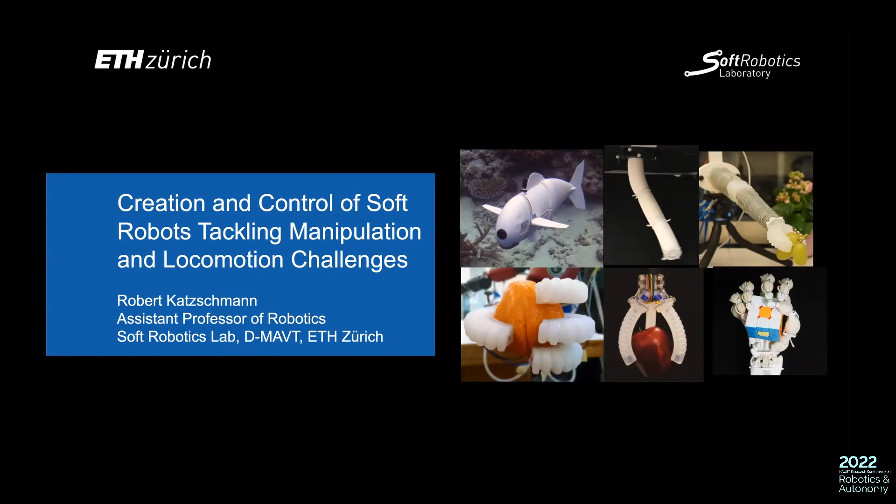So just a brief background to give you an understanding of how did I come to this point. Well, I previously was a systems engineer at Auris Health, and there I first got introduced into how to do medical systems, primarily surgery robots. And so it got me an exposure to the idea of taking devices that could be used as endoscopes or other sort of devices that can go into anatomical lumens. And from that point, I moved to do a PhD at MIT, and there my focus was on soft robots.

I then worked at Amazon Robotics as an applied scientist. And while I was at Amazon, I was focused on manipulation. And then I focused at a startup as a CTO to do food robot manipulation. So this is my background. But let's go into the motivation of my research.

So for my work, I've primarily been inspired by nature, as many have been, but what inspires me particularly is the continuous deformation that is used in the survival of creatures. So here you see a fish that's swimming against the stream. It's very capable of going against the stream. There's one caveat: the fish is dead, it's not alive. And so you see how this fish is swimming up the stream against the flow, but it's actually not doing that willingly because it was killed just before this video.

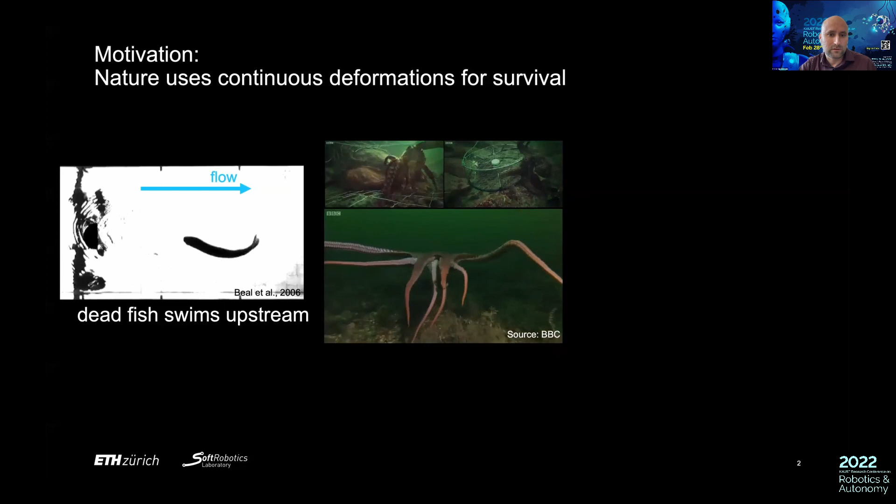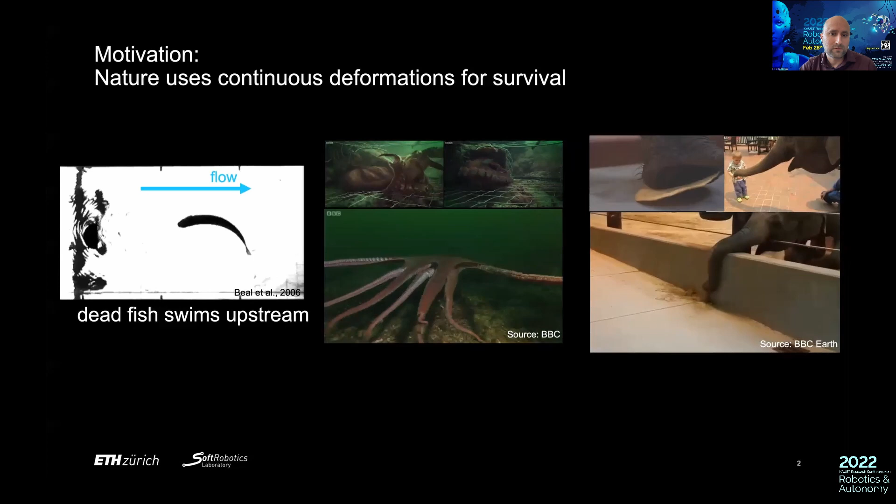And similarly, you can look at creatures such as an octopus, or you can look at elephants, and they also use continuous deformations of their tentacles or of their trunks, respectively. And they use that to basically manipulate the world and go around and feel out the world. So the octopus is using its tentacles to capture its prey, and the elephant is using it to conform to the environment and find food.

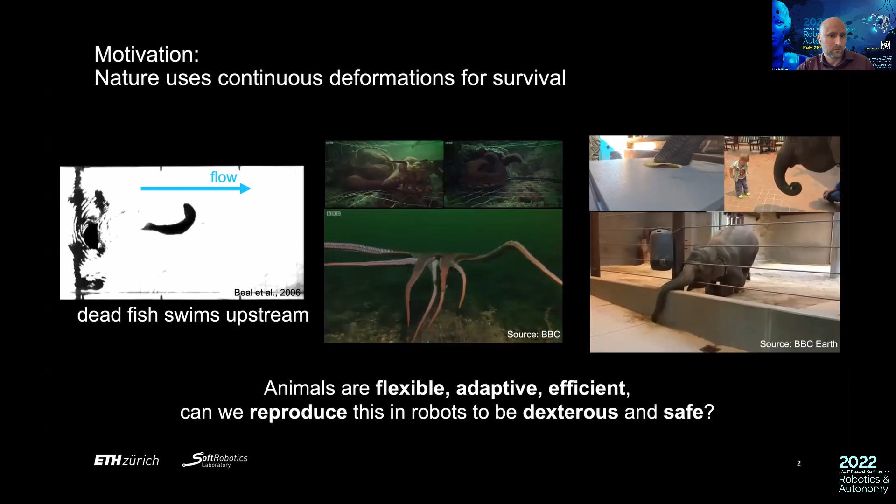So you see, animals are quite flexible. They are very adaptive to the environment, and particularly these creatures with these muscular hydrostats, they're quite adaptive, and they're also very efficient. They don't use the same amount of energy as we use with our robots these days. So how can we reproduce such built-in intelligence while being dexterous and safe with our robots?

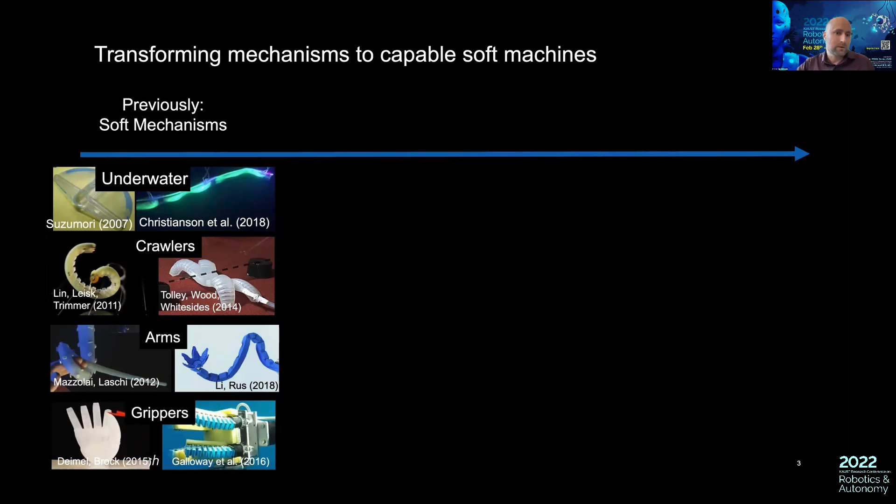So a lot of research in the field of soft robotics has been focused on mechanisms that can work underwater, or they can be crawlers, they can be arms, or grippers. And so the next generation of these robots is to take them to another level, to say, can we build systems that are fully integrated using these actuation mechanisms, apply controls to them to really move them in the way that we want them to behave and move around, and then apply learning algorithms on top of this to actually give us eventual goals.

So eventually our goal should be, at least in the short term, to build more biomimetic locomotion systems, flexible manipulation systems, but also to recreate intelligent behaviors, such as you see, for example, with an octopus. You can take a young octopus and trap it for its very first time into a container. Like here, you see this glass container with red lids, and then the octopus is capable of escaping by just figuring out that it needs to be lifting that lid. So that is quite a unique behavior that they can learn by themselves.

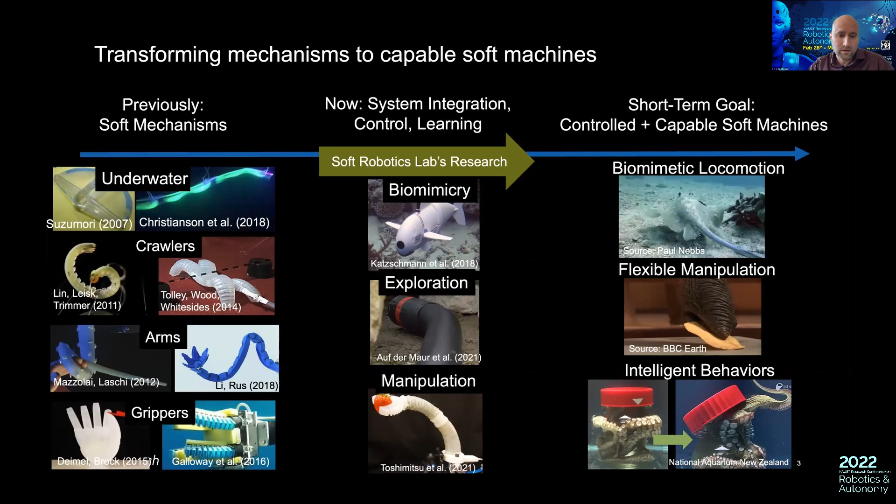So how do you reproduce this? These are really the questions that I'm interested in to achieve locomotion, manipulation, and these behaviors. So in this talk today, I will be telling you very briefly a bit about how we are making single soft actuators, and then how we use them for integrated systems, and then I will be speaking about modeling and control.

So to get started, how do you create a soft robot? You start off with a design for these soft actuators, and I won't get into much detail of how you make them. You can look up by now many different papers in the field that describe the different designs of soft actuated robots. But here's an example. This is a fishtail that has two chambers that can be pressurized. You pressurize it with liquid, and that causes the structure to deform.

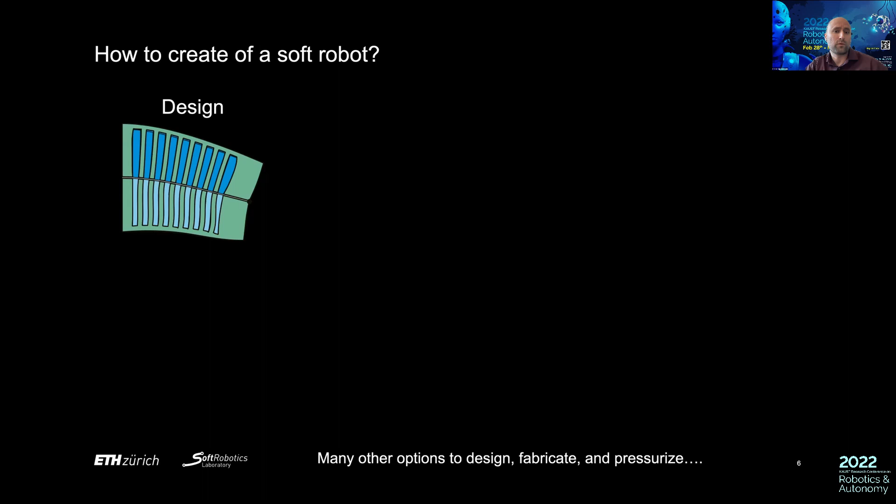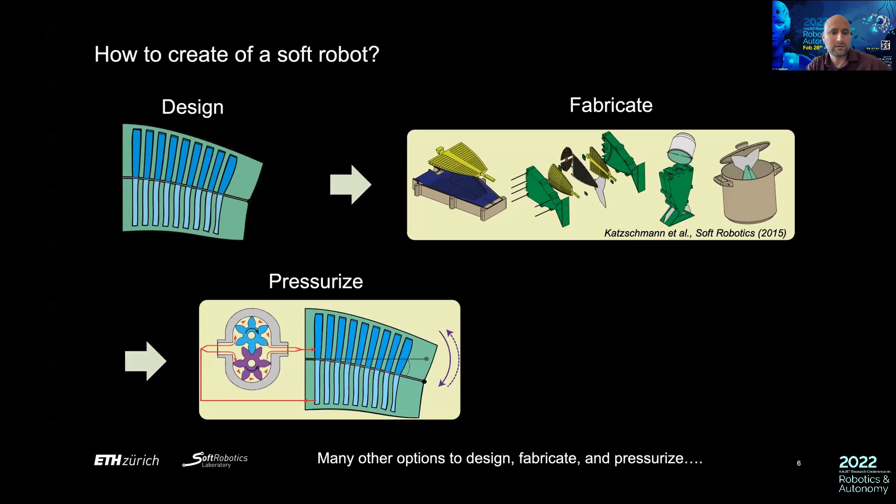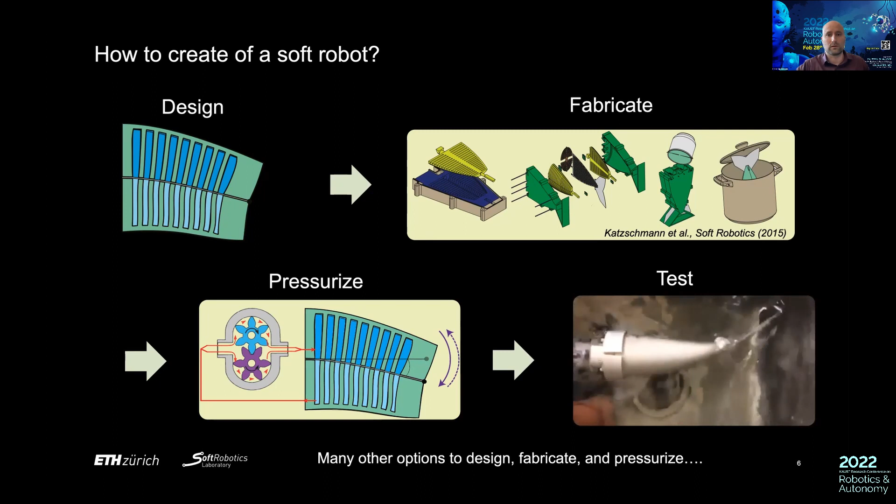And then you need to decide what fabrication approach you're going to be using. Are you going to be casting, 3D printing, or using another method for making these robots? And then in the end, you need to choose a source of pressurization, like a power source that provides the forcing to the structure. And so from this, you then have to go testing, and then you repeat this cycle over and over until you actually have a functional soft robot that can actually do what you want it to do.

So with this being said, let's see what we can make with this. With this approach, we can, for example, build a soft robotic fish. That was one of the things I've done for my PhD, which was this underwater fish robot that's using this tail. And it's a structure that you can then deploy in the ocean to let it swim. And the goal was to build a system that we could use as humans deploying it in the ocean to do biomimetic locomotion, so have something swim like a real fish, and see how we could use this as a spying device that could observe marine life.

So here's SoFi, which is the underwater exploring robotic fish that is capable of swimming in the ocean and can look into its surrounding environment and look at what's going on. And as you see, SoFi is swimming across the waters, and it's just looking at its surrounding species, and it's filming continuously, while there are divers a couple of meters behind sending it communication and telling it what to do.

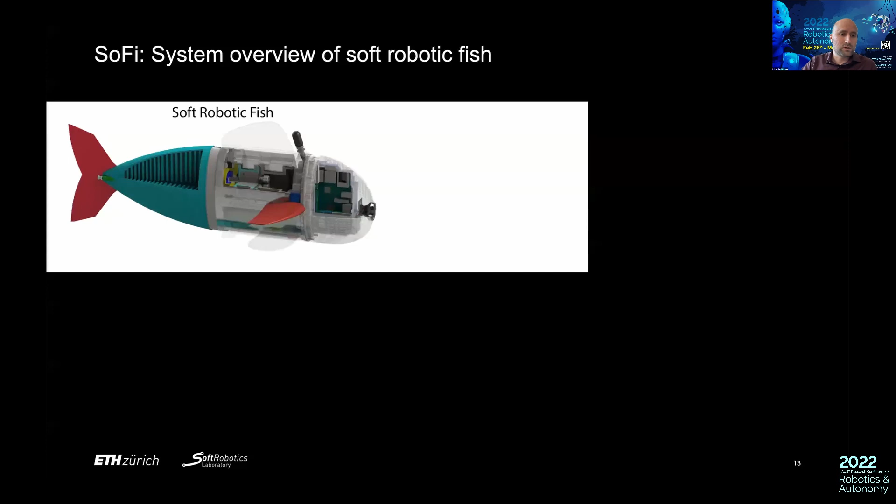So the system is essentially a combination of a soft actuator and a rigid structure. So you're combining both the silicone tail that's shown here in green. The green tail additionally has a built-in fin that goes through this tail. And additionally, on the other side, you have these buoyancy control units, the pump and the dive planes, and also electronics that you need to communicate with it. So there's an acoustic modem on board.

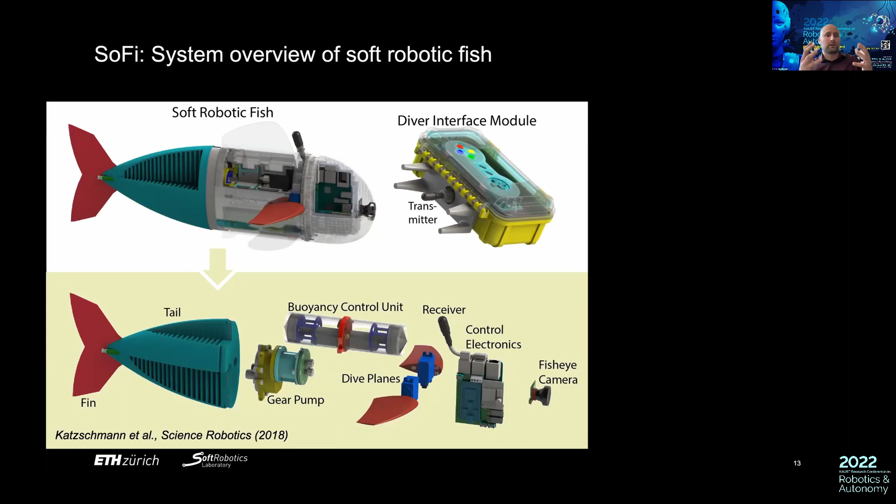And we're using this acoustic modem so that on the other end, the diver is holding a device, which is a diver interface module. And this device can talk to the fish and tell it what's going on. So here you see we have this device broken up that is capable of going underwater. It's filled with oil, so this allows it to be portable and with the diver.

And so we took SoFi into the ocean, and we tried this out in multiple coral reefs, and we tried communicating to it, and that all worked, and we were able to send it commands and to tell it where to go. And then we had it navigate over the various coral reefs. Here's an example of it going over the cabbage patch, which was one of the coral reefs that we were diving at. And in the end, we could use SoFi to basically get close up to other species and film them and observe them and learn from them.

But one thing that was limiting to all of this was that all of this work required manual design to come up with this soft robot, with this creature. And there was only limited autonomy to the system because, I mean, it was able to swim and we were able to tell it commands, but SoFi would not have been able to survive by itself down there in the ocean if there wasn't a diver that every once in a while could help it out.

So that being said, that got us to one of the interesting topics that we are focused on: how do you actually model these robots? Like, you can build them, we can show that they work, but how do you actually deal with these systems if you're having not just one, but multiple of these actuators, and you bring them into series, you bring them together, and then you want to show that you can build something controlled and a learning application.

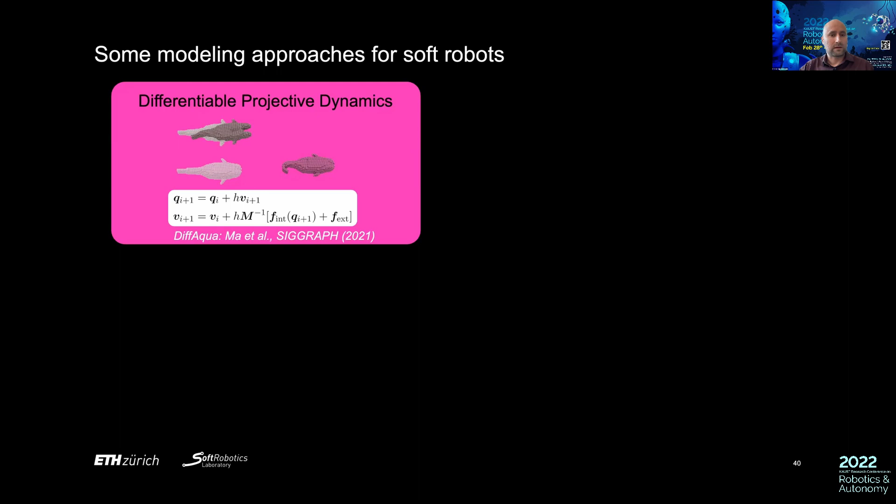The other method we're using is minimal parameter models, where we are just making very strong simplifications about the structure, and then we're using an augmented rigid body model to describe the deformation of these continuously deformable structures. Then we're also looking into reduced order finite element methods, where we are not taking a full finite element method, but we are then reducing its order to still capture the main modes of deformation. I will not be speaking about this today.

And then the 4th method, which I will also be presenting today, is the deep stochastic Koopman operator, which is a method that allows us to learn the dynamics of our system in a way that it's a bit easier to understand what this black box model is learning, and then applying it to control approaches that work on a lifted Koopman space.

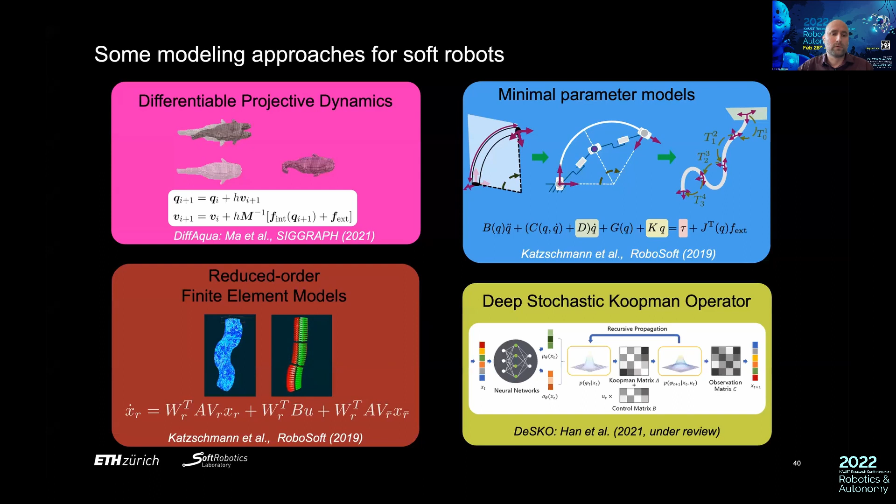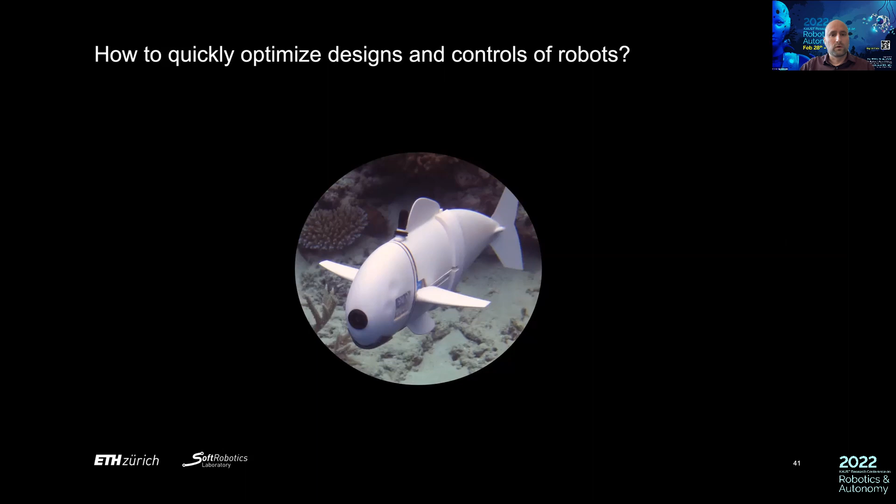So let's start off with this problem of the fish again. So I was saying to you, we were using this manually designed fish robot. And the big challenge with this man-designed fish robot is that, well, we do not quite yet know what shape we should be taking to get better performance and what controls we should be applying to a structure if we have more chambers that we can control individually in the soft actuator. So what we're saying is, well, let's say we have inspiration from nature. We have all these different shapes and designs of fish that we could be taking.

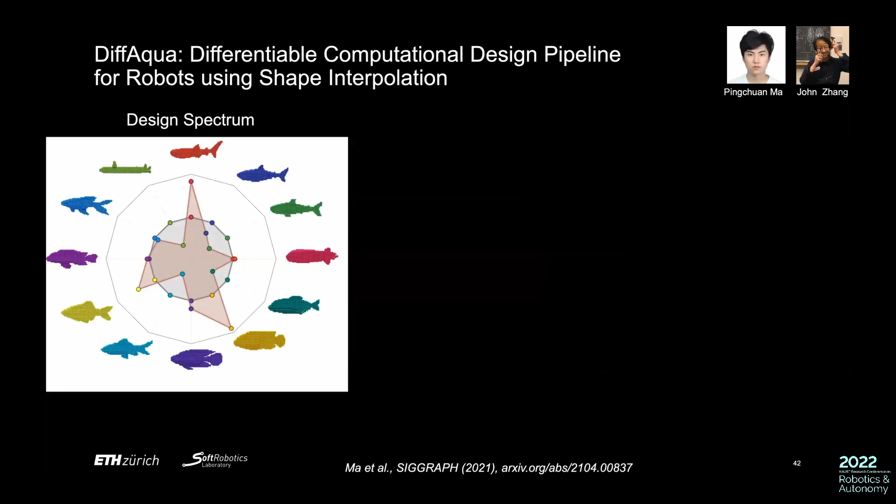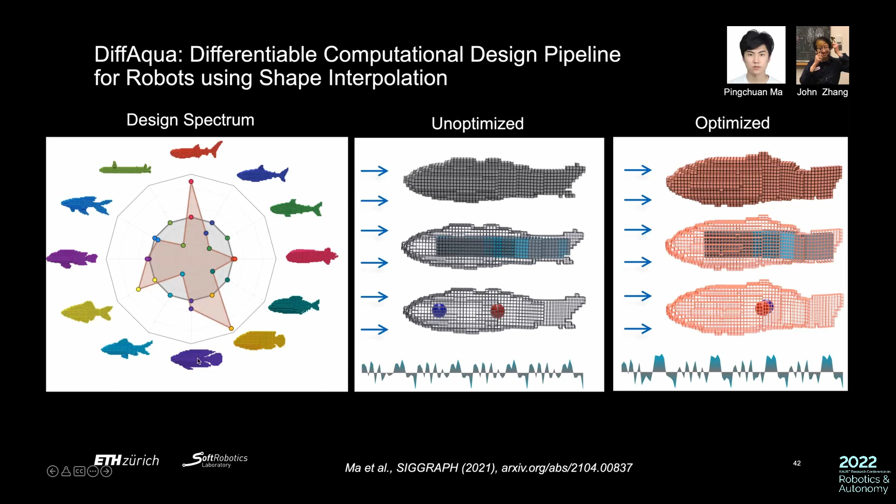And now let's take those designs and let's say we span the whole design spectrum. We start off with an unoptimized design and we end up with an optimized design for a particular task. That's the pipeline that we are basically proposing in our work: this is how you could be starting off with this model and you end up with an optimized model that's somewhere a hybrid in this design space. So let's say you initialize the weights of all of these designs with this level, and after our optimization, you come out with this final, this is a radar chart that you're seeing here, final set of weights of how much each different swimmer is part of the final design.

So here's a visualization of this. So say you have 3 different designs you start off with, and this is how it would look if you were to interpolate between those different designs. So you see I'm going in the interpolation space, I'm changing between 2 different ray type structures to a normal fish, and that's how the muscles are allocated within the structure.

And now we are taking this design, and this is our design space, it's parameterized, and then we are running this into a controller. We have 2 different control approaches: we either run a sinusoidal control approach or a fully connected neural network that allows us to send command signals to the individual muscles. And with this, we can then control the fish and tell it, please go forward, please go left, go right, and do a swimming task that we are defining.

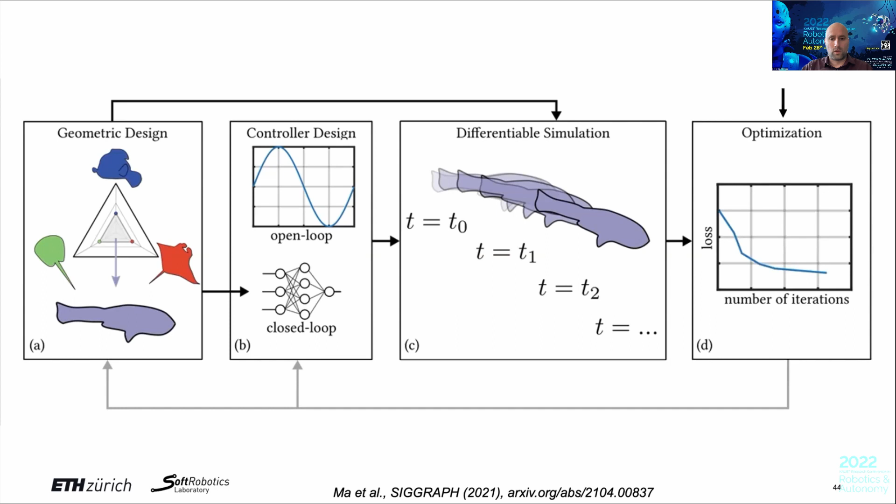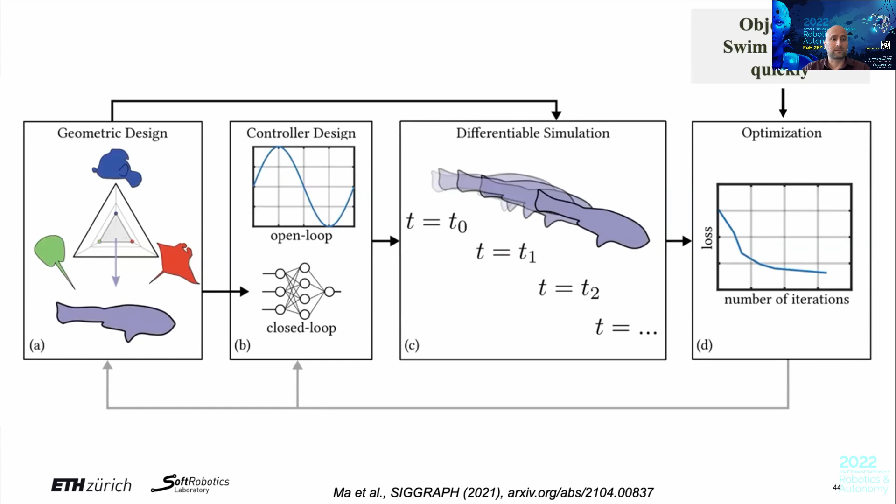And in the end, we come up with a loss. And that loss then says, okay, this is our final loss. This is what we are trying to optimize for, let's say, fast forward swimming, and it's capable of achieving a better forward performance. So let's say you start off with this initial guess up top, and in the end, you come up with this optimized shark design that came out of this interpolated space of designs. Here we haven't optimized for the control, we only optimized for the shape.

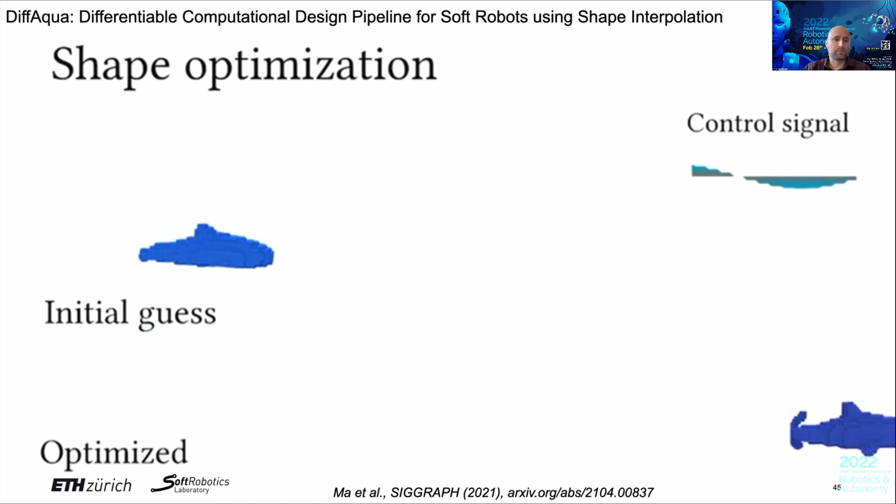But we could also similarly, for example, take the 3 initial shapes, which are the baseline shapes up here in red, green, and blue. And in the end, we come up with this optimized hybrid swimmer design, where we're able to come up with both an optimized design, but also an optimized control policy that's acting on the muscles that we distribute in the structure.

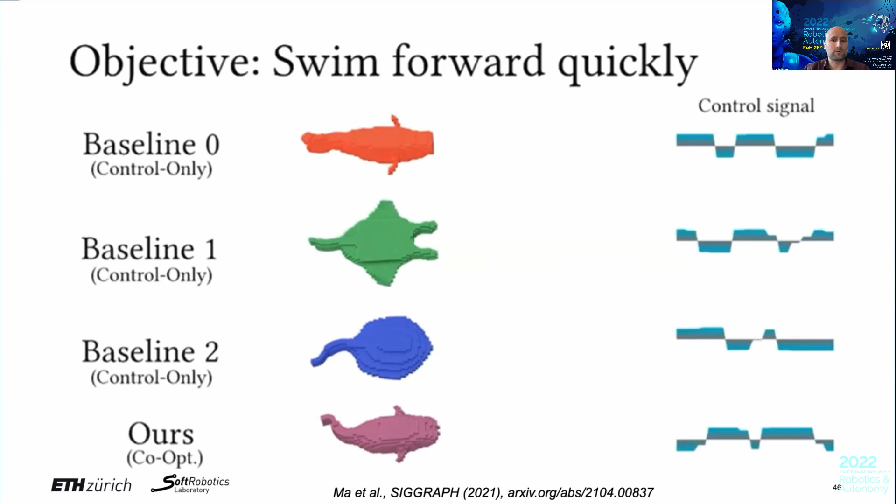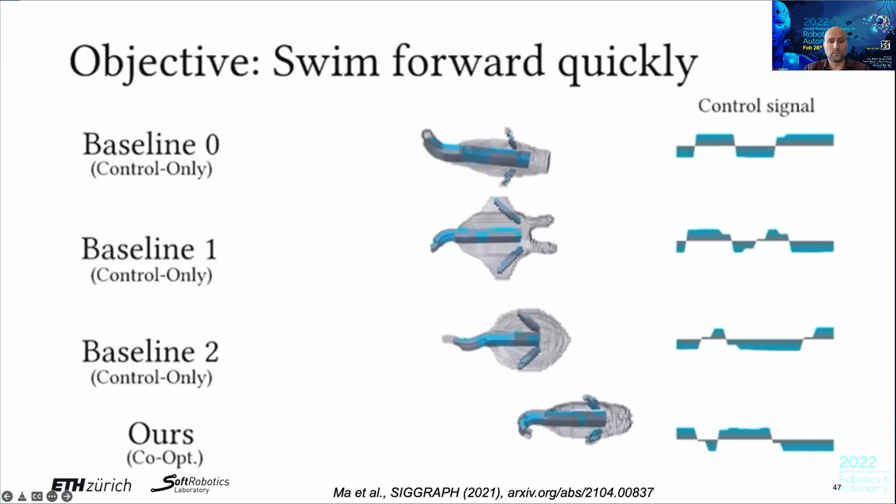So in the next slide, you see how the muscles actually are actuating. You see how there's a traveling wave going through the muscles of the structure, causing the swimmer to get further in the same units of time. So all the 3 top swimmers on the top, they're not as fast as the one on the bottom.

And then when you look at this, we are basically doing a multi-objective optimization here. We are co-optimizing for multiple objectives. We're not just wanting to have a fast swimmer, but we also want to have, for example, better efficiency, meaning less energy usage of these artificial muscles.

So on the top, you see this trade-off space starting off with a high-speed swimmer that is not very efficient. And then you're working your way down to medium speeds, to the medium efficiency, and down to a high efficiency swimmer. And this is basically our Pareto front that we are traveling along. You see it with these white and these colored dots along all of the different designs that we were generating in our approach. And the nice thing about our approach is because it's a fully differentiable pipeline, we can just step with gradient descent through this pipeline and optimize it.

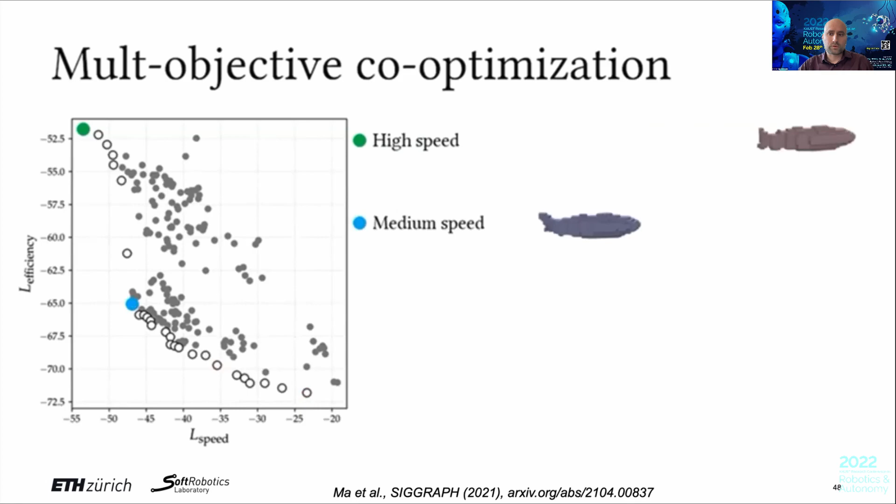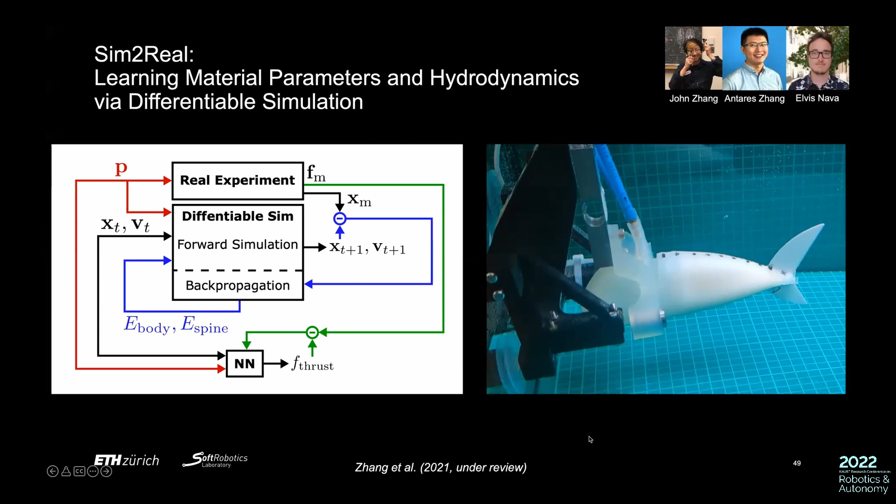So then we tried this out and we actually took this to a real life application. And we said, hey, let's try this out. And we see we can actually also replicate this in an actual fish robot that we're building and trying it out on. Then we combine this with a thrust measurement unit, and we can see how well does this work.

So our simulation then has to also account for the buckling effects of our tail. So when you're deforming the tail, you're not having just bulging on the left side, but you also have buckling on the right side. And we also have to look into how to predict the thrust forces that are caused by hydrodynamic interactions.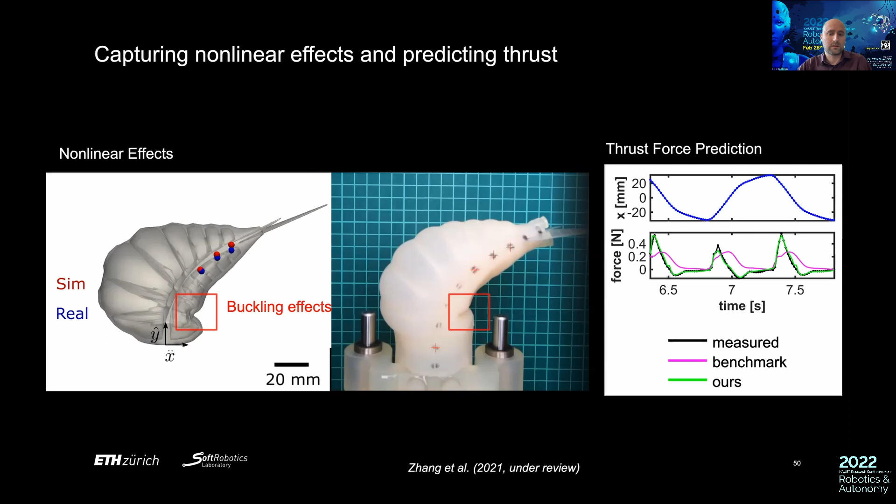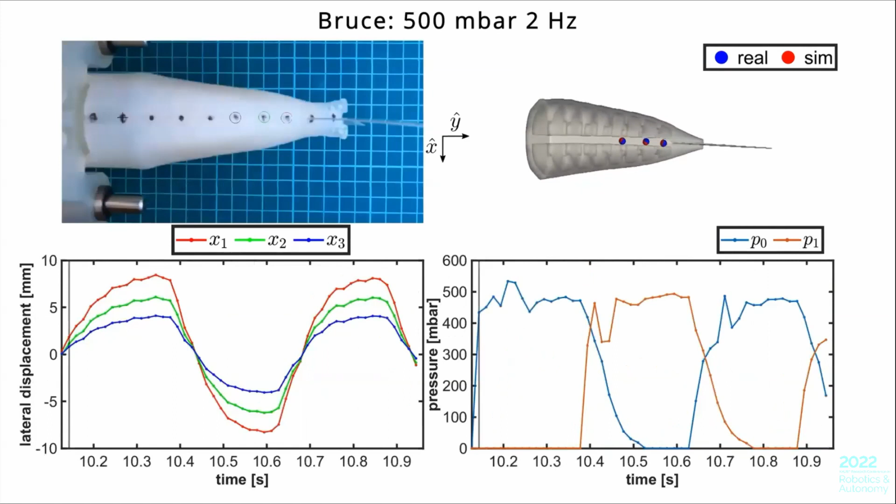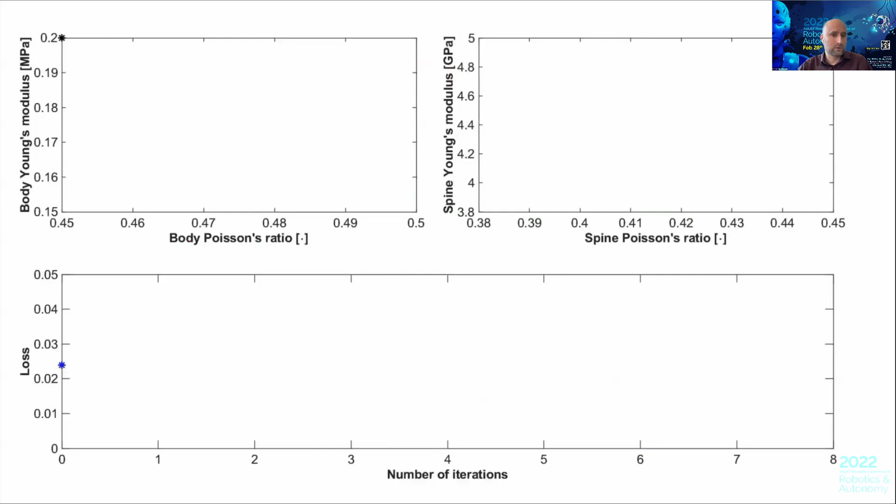So we then ran a couple of different experiments where we built various designs of these fishtails and we tracked those designs, and that gave us the ability to look at how do we do a sim-to-real transfer between our simulation and our real designs while trying to be as accurate as possible. In the end, we could identify the material parameters of the bodies and the spines, Young's modulus and the Poisson ratio, with our approach in just a few steps of iterations, which other methods wouldn't allow you to do as easily.

So this is one way we have tried this on fishtails, but we've also been interested to apply this to other structures. So we've also just recently published this work on sim-to-real for this differentiable FEM. In this case, we've tried it also on robotic arms, on cantilever beams, and other soft deformable structures, not just a fishtail. And in this work, we are describing the three major recipes that you need to follow to get the FEM to match the reality, which were related to the meshing approaches, to the damping of the structure, and to the actuation mapping.

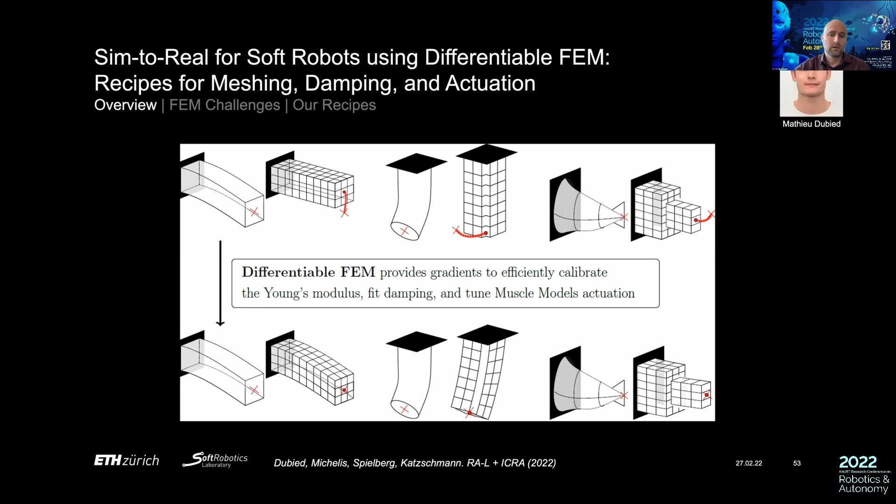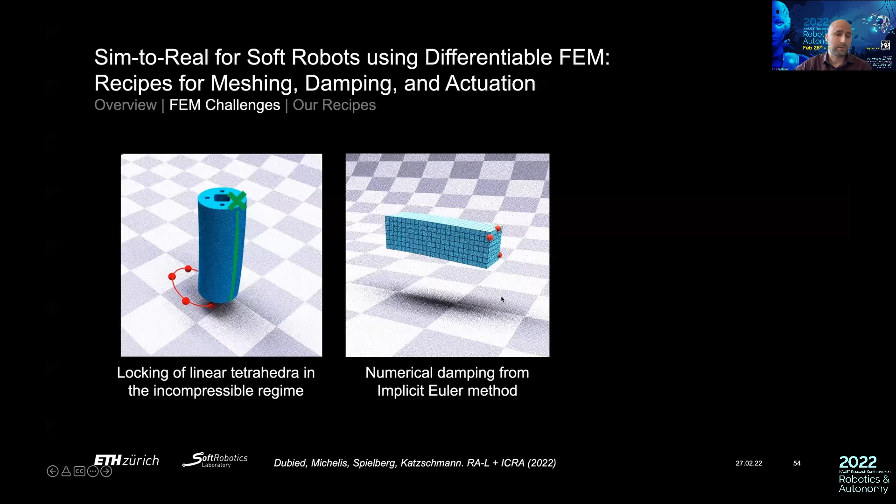So to give you an example here, we started off with looking at these structures that are made with various meshing approaches. So we looked at tetrahedral and hexahedral approaches to meshing our structures. And then we were looking into, do we get certain nonlinear effects just through the choices of meshing that we would like to avoid? The other problem was that we would get numerical damping in our structure just because of using a fast implicit Euler method.

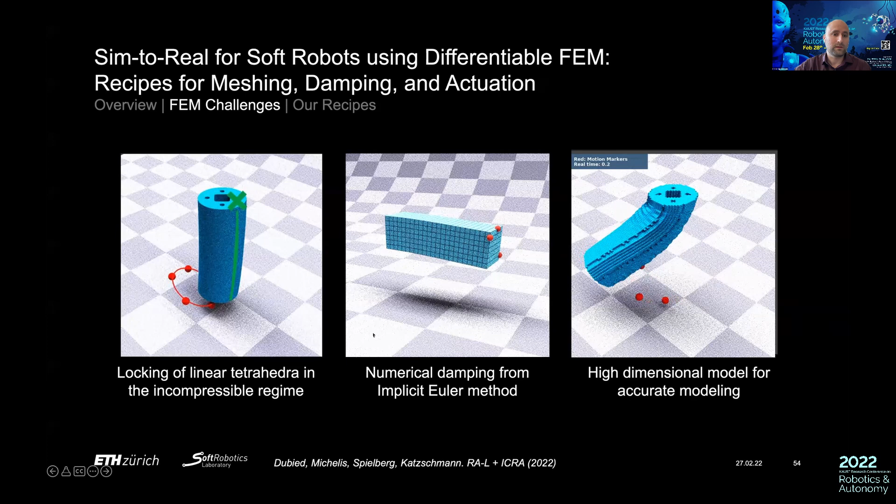And the third thing that we had is, how do you deal with the high dimensional model that we are facing here? And how do you still get a low dimensional model that's still somewhat accurate and can still describe the actuation? So these three things we were looking into and trying to match with real examples.

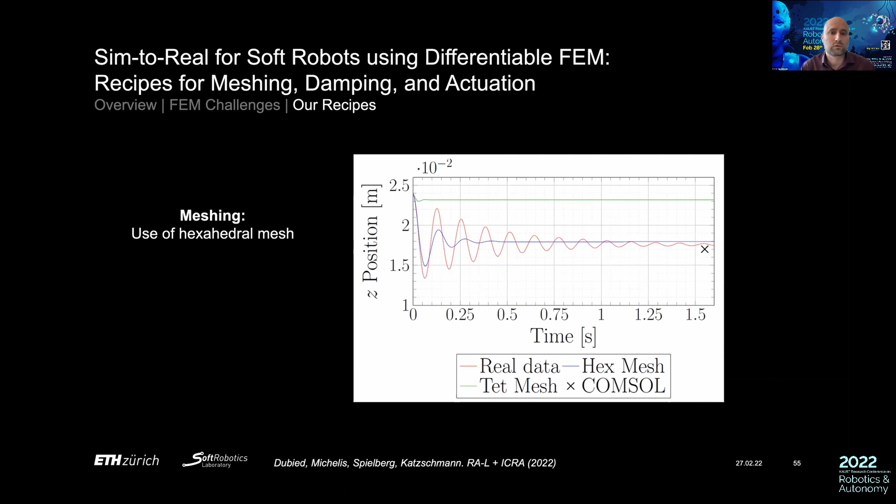So for the meshing example, we looked into how hexahedral meshes versus tetrahedral meshes, COMSOL as our baseline, and real data from a real robot compare to each other. And we then were able to derive what you need to do to get your simulation to properly do a sim-to-real transfer.

Then we also looked at the damping behaviors between the COMSOL proprietary solver and our projective dynamics approach. And then we looked at how we can tune the damping so it's actually correct damping as the system does and not a numerical damping effect.

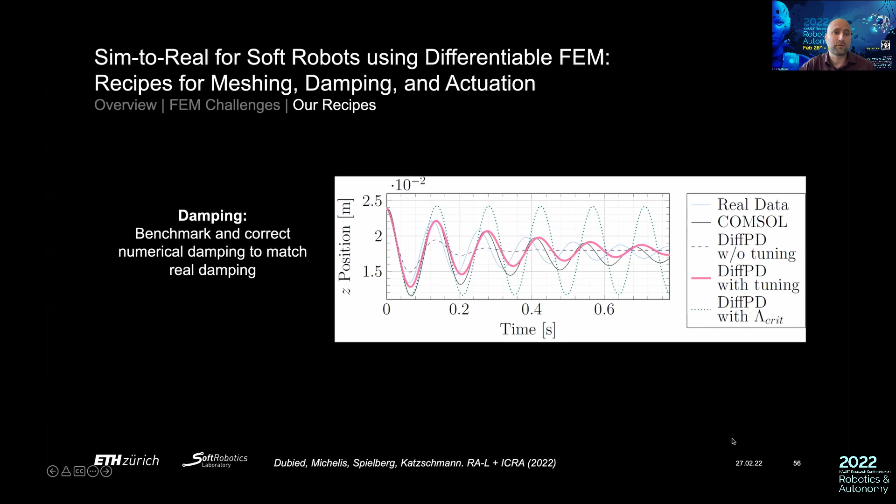So we introduced an additional damping effect that allows you to now match it to the real damping in the real system. And then in the end, we postulated an actuation model that works as a surrogate to the real actuation chambers, because the typical actuation chambers in these soft arms are these cavity structures, which require high fidelity FEM meshes. But if you want to run this in a reasonable time frame and want to optimize our structures, you need to have an actuation method that models these muscles somewhat realistically while still being computationally tractable.

So those were the three insights from this work. And so please check it out if you're interested to see if that could help you for your modeling challenges.

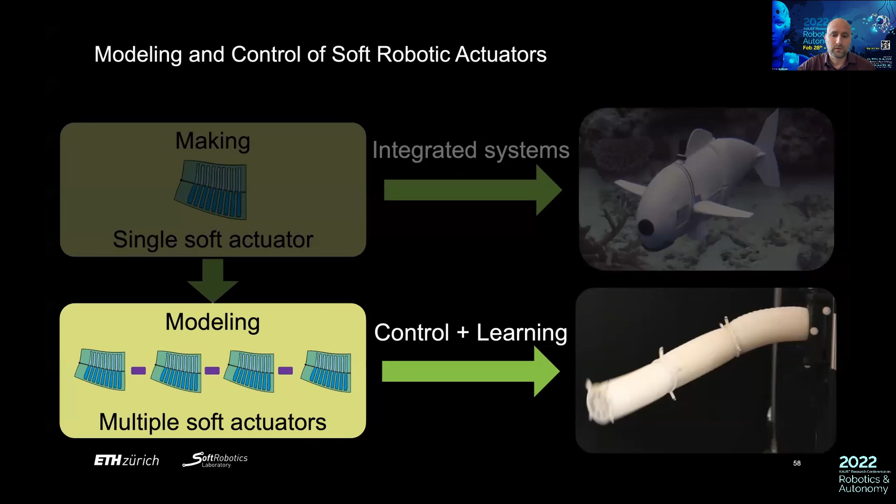So now I want to give you a little bit of an idea of how we are then applying these modeling methods to robotic control, for example, for the soft robotic arm. And here we are, for example, looking at this first principle, going back to the slide, this minimal parameter model. So we are using the minimal parameter model to explain the dynamics of our structure. And it basically helps us to learn from the classical rigid robot literature and apply this literature to the soft robots by saying we can approximate the real soft robot with an articulated rigid robot model and basically use this discretized world and still somewhat get reasonable dynamic assumptions.

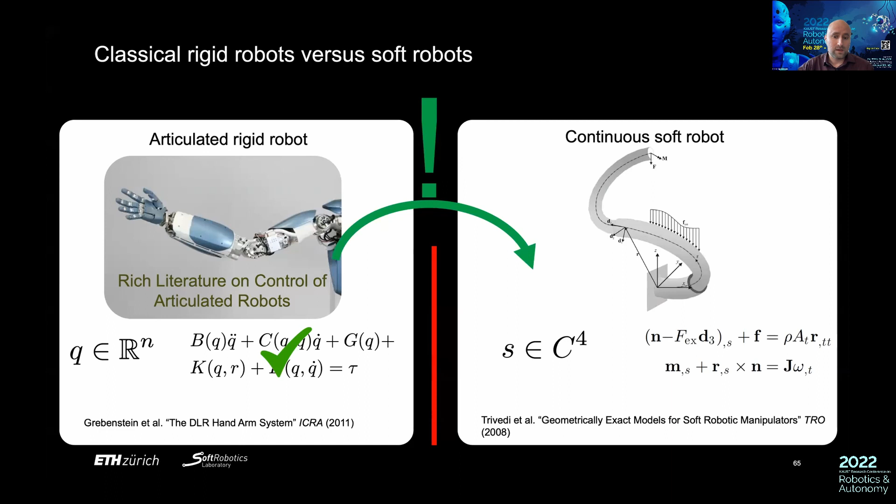And without going into detail, which I don't have time for today, but you should check out our works on this, we then not only develop these models, but we also build multiple 3D soft arms that are using these analytical models. And these analytical models allow us to describe the full dynamics of the arm and then use it for proprioceptive measurements and also to estimate how much our arm is picking up as the various types of objects that could be picked with it.

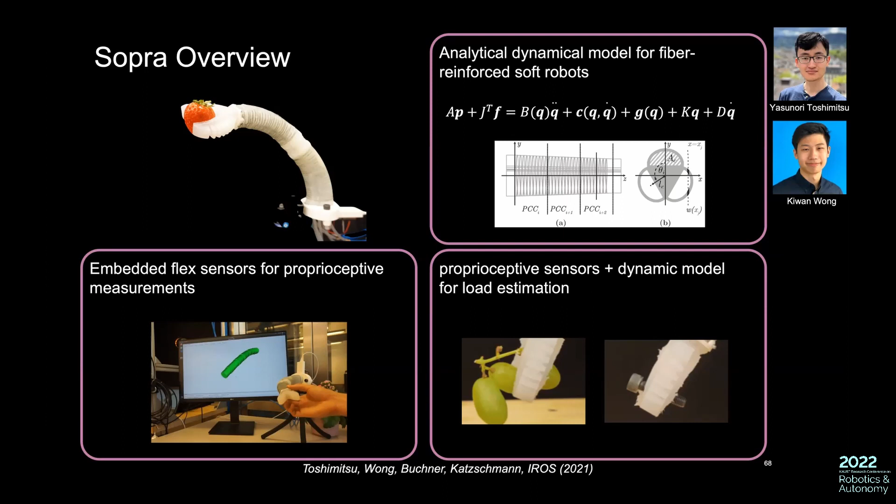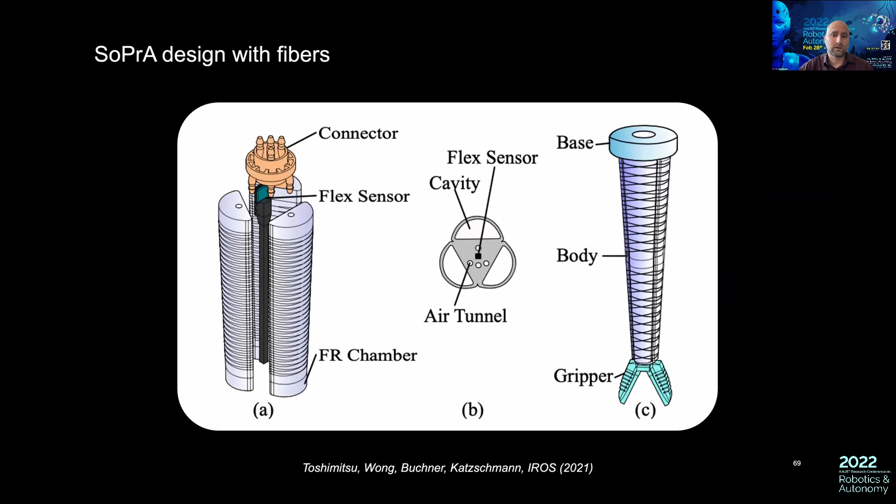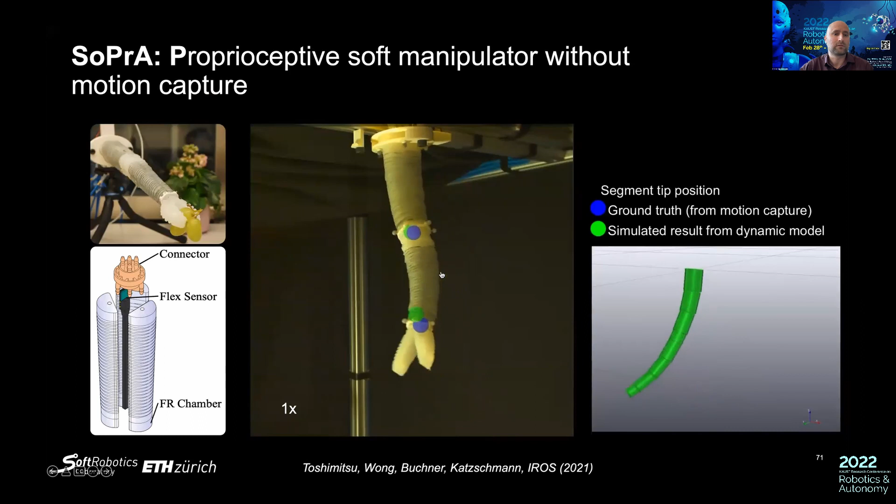The other thing we did is we integrate into our arm a proprioceptive sensor that has the ability to measure flex of the arm. And that allowed us to then also reconstruct the motions of the arm without having to use any more motion capture systems that are tracking the points of the arm, but we can use the interior proprioceptive sensing nodes instead. So that will help us to use these arms outside of a motion capture rig.

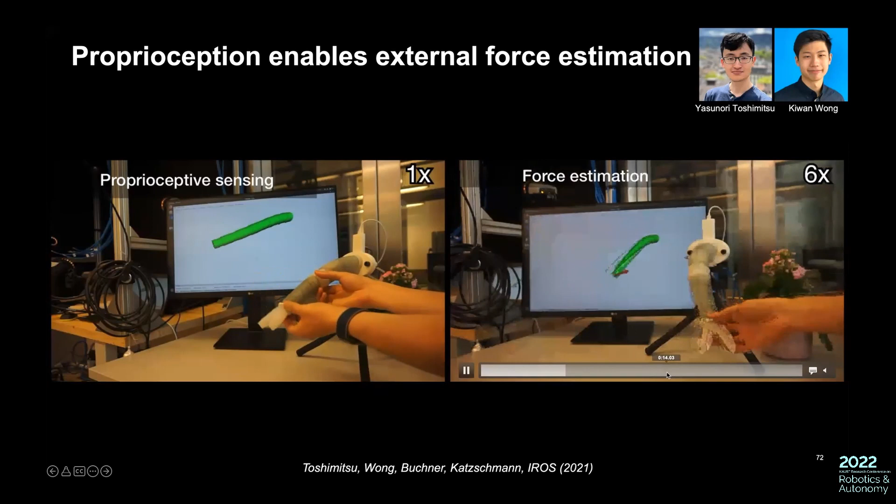And then what I was just mentioning is we could then use it to reconstruct the shape of the arm without any external cameras. And we're combining basically both our dynamic model and the sensors here together to do this reconstruction. And we are also using it to do force estimation. So we can estimate how much force is acting on our structure as a human is pulling on the arm.

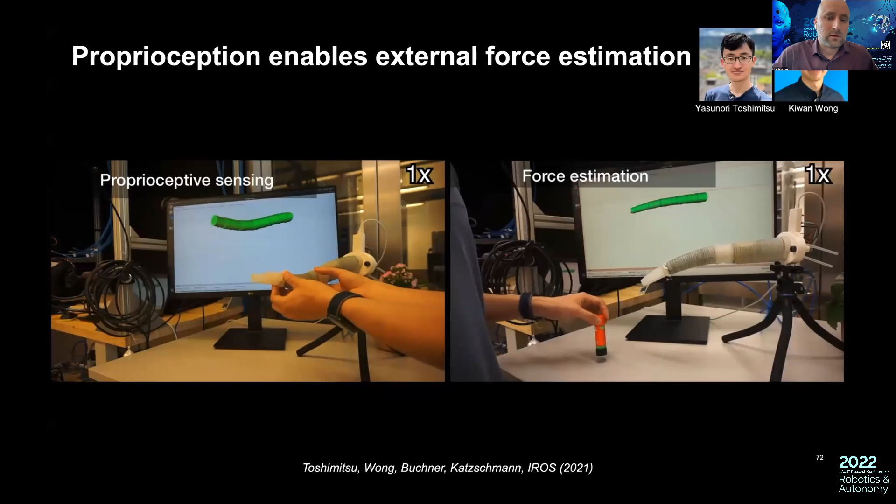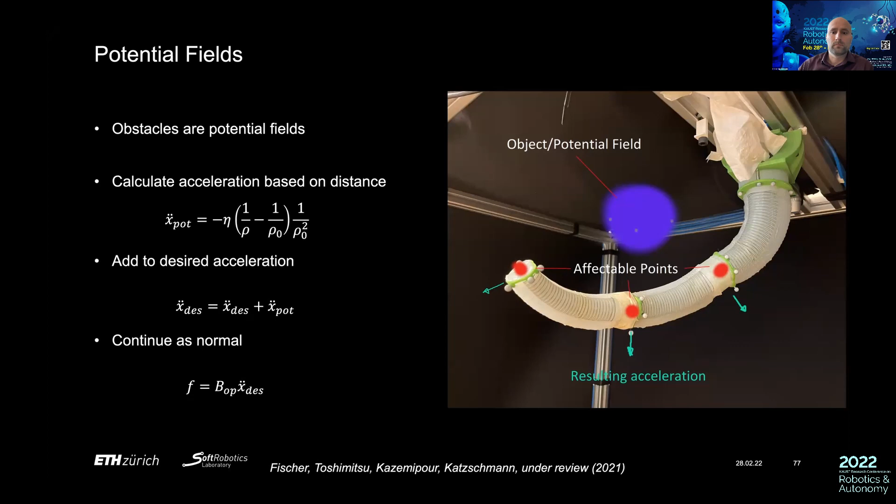So with this, we then went a step further and said, well, why don't we take this arm and apply operational space control to it? And particularly we use potential fields. And so we were then saying, okay, we're gonna use potential fields to move this arm through a range of obstacles by using a well-known technique from rigid robots and use this for force control on our soft robot. With this, we were able to do things like drawing on a wall or throwing objects or going through obstacles.

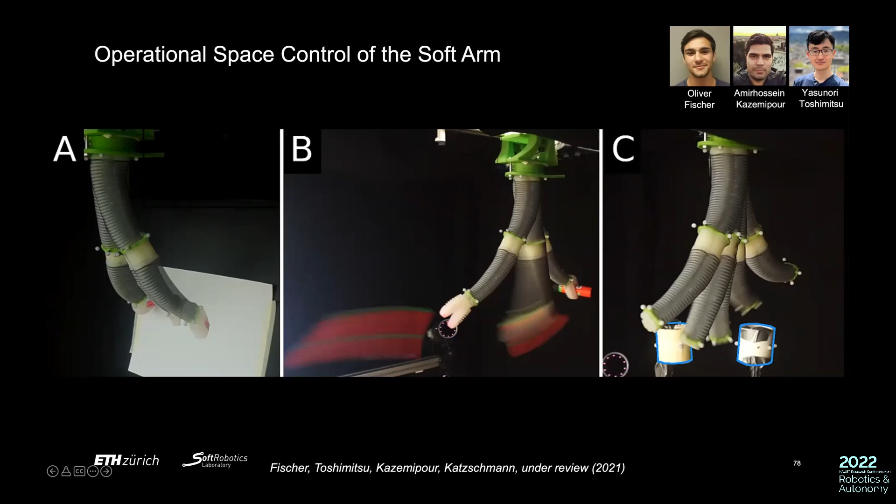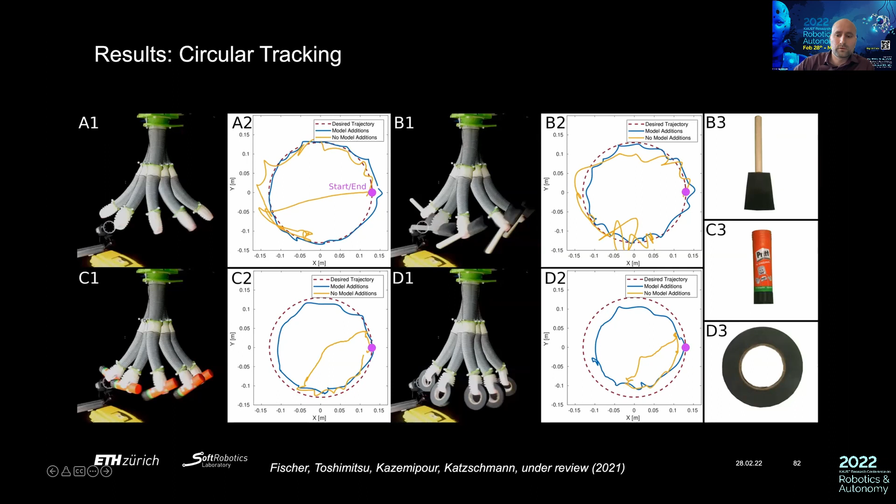And it allowed us to do detailed evaluations of using various objects that we are manipulating with our arm. We put a gripper on the arm to actually manipulate objects with it. And we then also did throwing tests with the arm. And we also did pick and place motions with the soft arm. So this is a completely soft arm, and we applied this operational space control framework. And based on this, we also have tried out a few other approaches.

I know I'm running short on time, but I want to cover two more things. So one aspect we looked at is we used adaptive control approaches that let us learn the model adaptively on the fly. So this was another paper that we are going to be presenting at ICRA this year, where we are comparing baseline control approaches that have fairly low capabilities of running dynamic controls, and we compare that to an adaptive control approach.

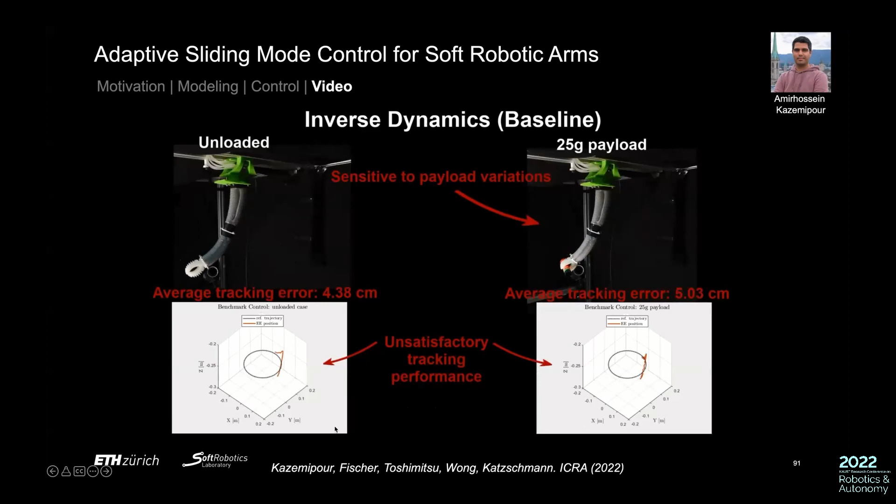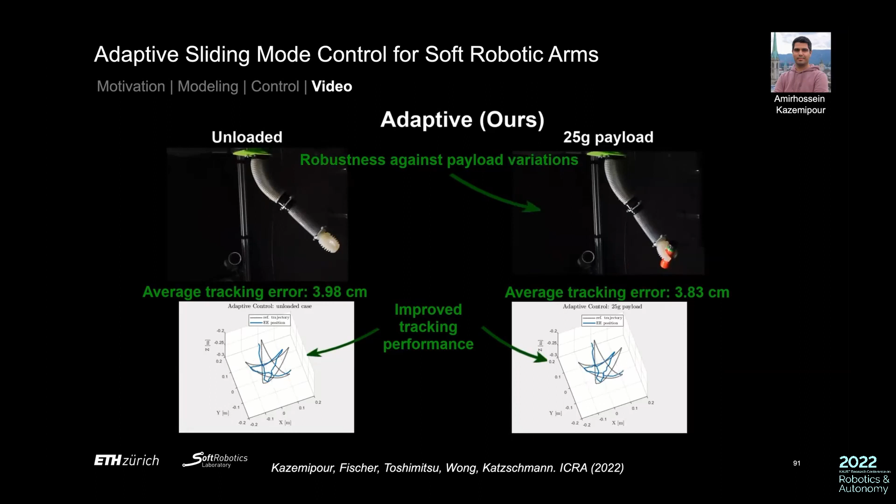So in our case, let me show you this, we can now also take loads onto the arm and account for those loads and still do fairly accurate tracking of, let's say, a star trajectory and other trajectories in real time without having accounted for these objects beforehand.

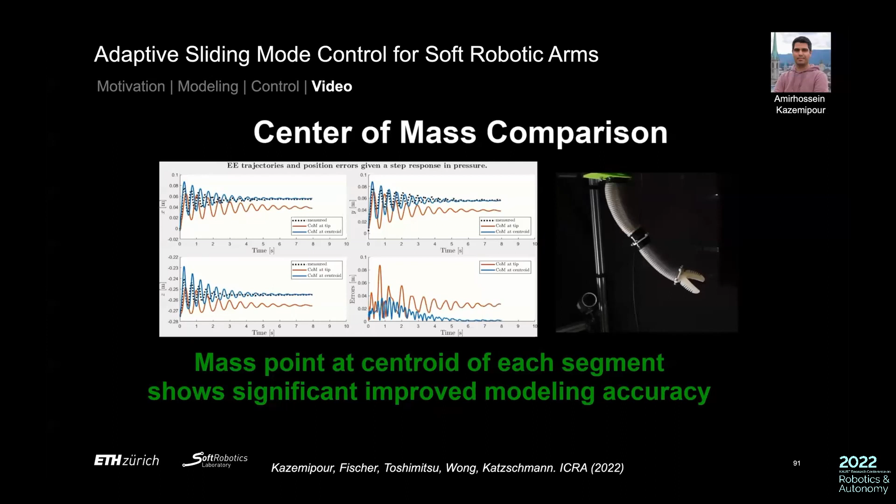So with an adaptive control approach, we can now do control even under uncertainty that we were not able to do before. Another thing that is also interesting to us is to take our soft robotic arm and bring it onto a drone, because we want to show that we can control this arm even when the base of the arm is free floating.

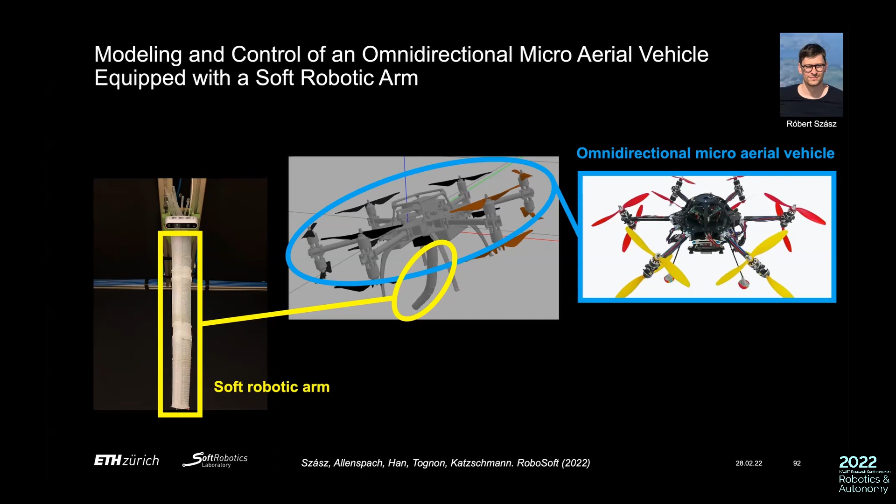So we then basically took our soft robotic arm and said, we are putting this onto a drone, and we started off designing a control for this in simulation. And we were able to show, and this is going to be presented here at RoboSoft, that we can make a system that is capable of having the soft arm on it, and we can still control it in operational space and, for example, follow trajectories, deal with disturbances, and also fly around in space.

And so, for example, tracking here a circular trajectory while the arm continuously is following the tracking points while the drone is flying around. So we're using this omnidirectional drone, and we're using a soft arm that we are modeling on the bottom of it.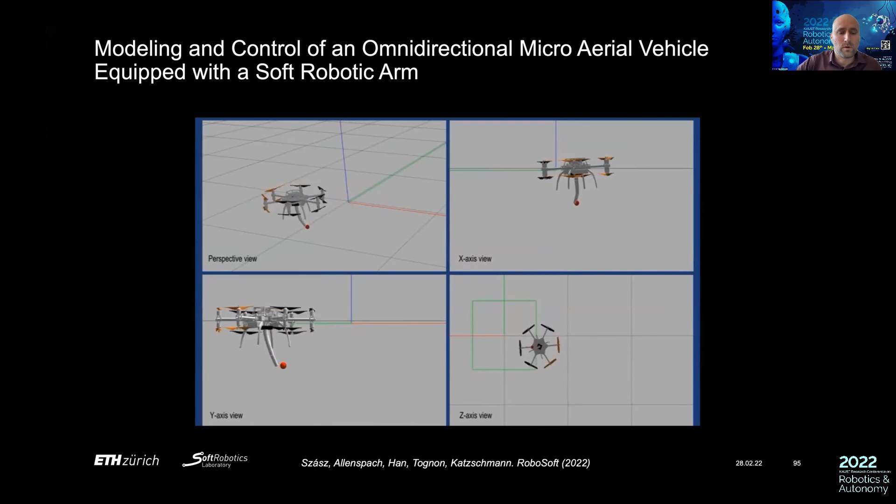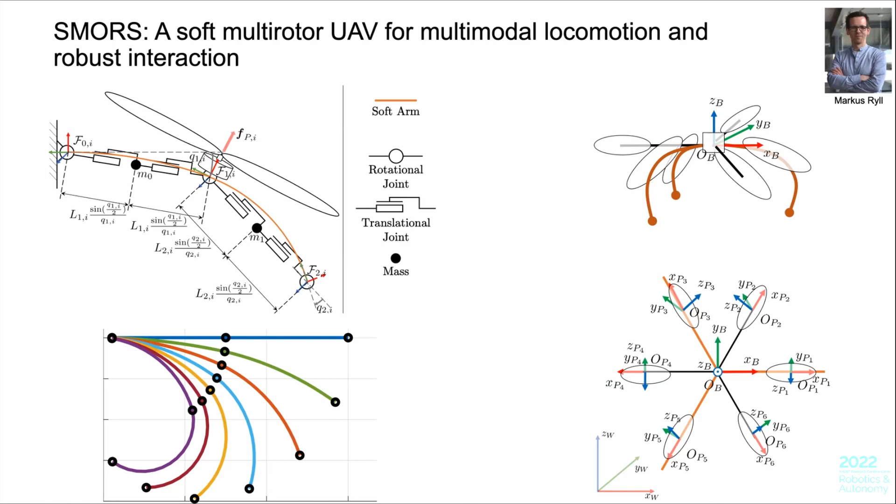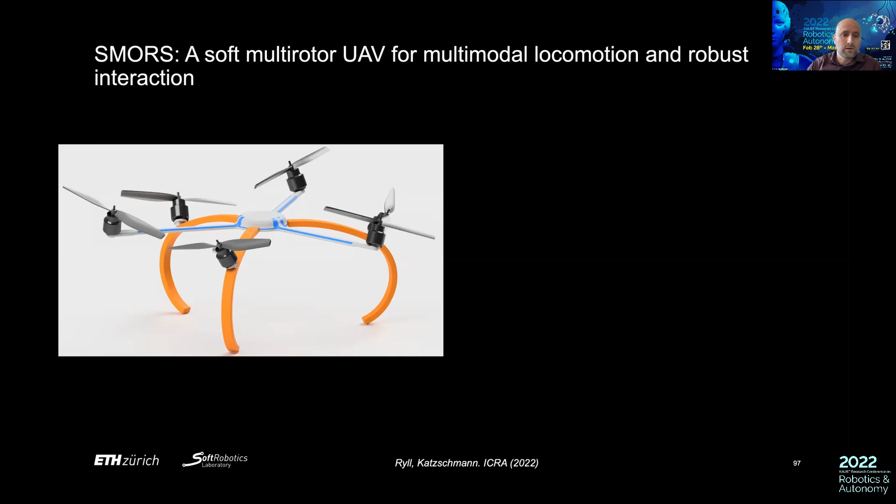Another idea that we had is we could also make the wings of our drone soft. And this is what we did in this work here, where we have a multi-rotor setup. We have multiple rotors combined onto these 6 arms, and 3 of those arms are soft and 3 of those arms are rigid. So we came up with this drone we call SMORS, and this is also going to be presented here at ICRA, where we describe that we have the ability to control the softness or the articulation of those 3 thruster arms, plus we can also use thruster forces on it.

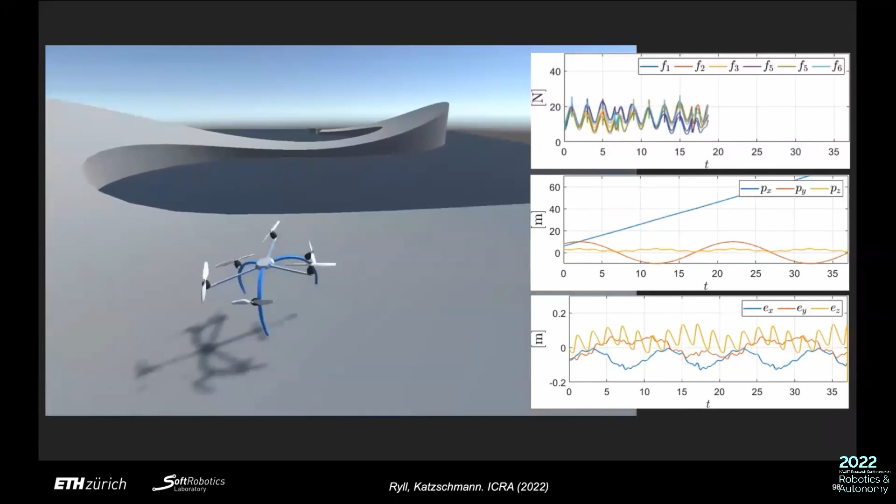So you see this system in action. You can see we can now use it to actually do a bimodal flight and hopping with the setup. So the thing can hop off of the ground and go around the path and also fly at the same time. So far, this is just an idea that we validated in simulation. And we are now obviously trying to build this system as well.

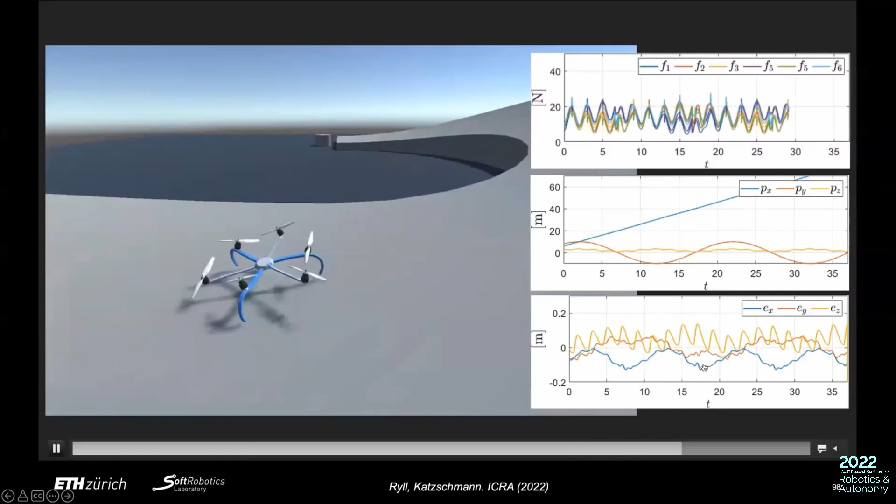Another thing that we can do with this is we can use these 3 arms to also do grasping maneuvers. And here is our first test of using a thruster on the arm and trying to build this system and seeing how much we can actuate these systems together. So I've showed you a couple of different approaches.

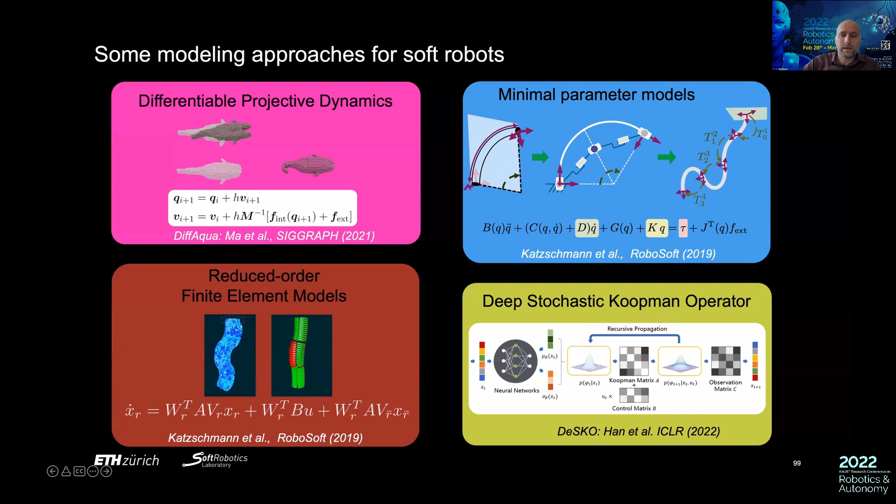And the last one I want to mention that you should check out is we have developed a framework. We call it DeSKO, deep stochastic Koopman operator, and it allows us to black box model a system where you can track the states of the system and lift them into a higher dimensional space. And then in this higher dimensional space, you can apply control techniques that you can typically not apply to these highly nonlinear systems.

Because you take a highly nonlinear system, you learn its representation in the higher dimensional space, then it becomes a high dimensional linear system, and then you can apply probabilistic state transitions in that high dimensional space, and then map it back to the space that you're controlling in.

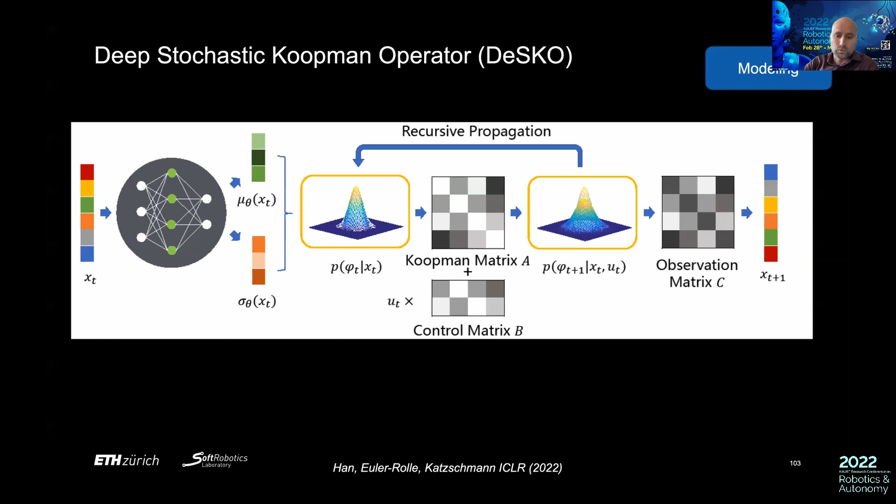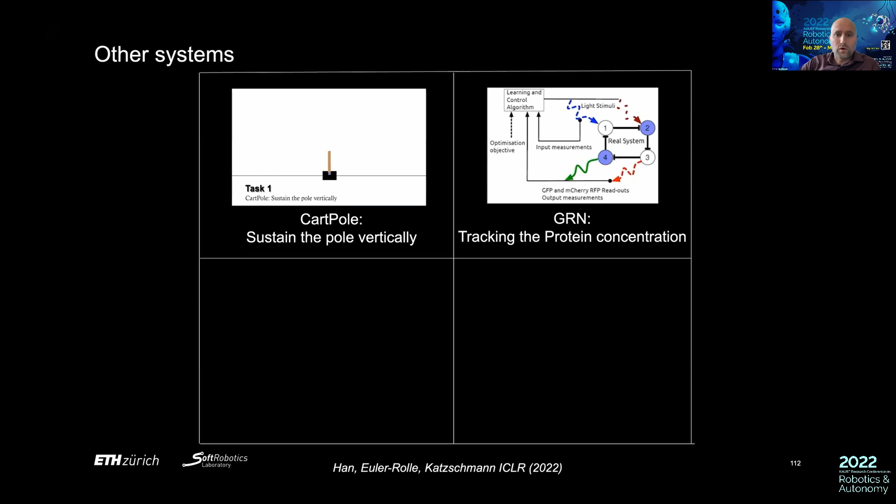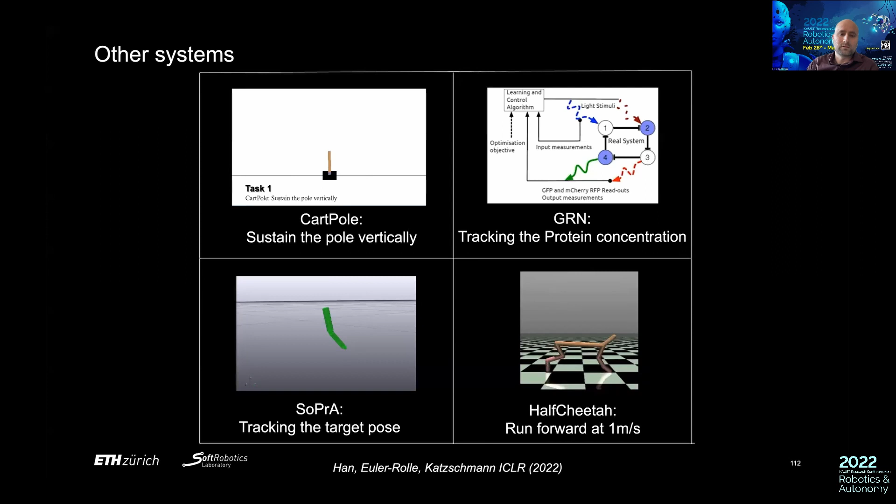So with this approach, we were able to control various systems, such as a cart-pole. We even took a network of genes and also controlled this network. We applied it to a soft robotic arm, and we also applied it to a half cheetah. And so this work is presented this year at ICLR, the International Conference on Learning Representations. You should check out our paper if you are curious about using this more black box model. And we were able to do more robust control with this setup.

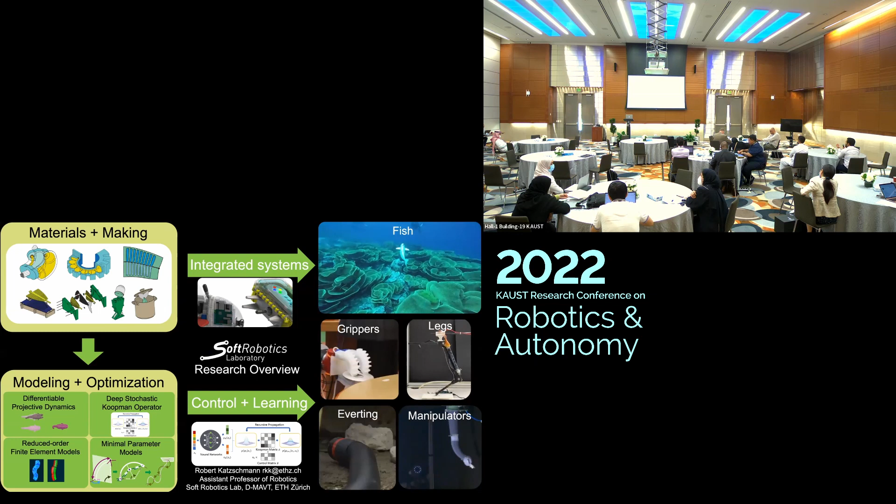So if I understand your question correctly, on the one side, you're curious about how well the arm can move into various shapes and spaces, and then how well it can grasp various objects. The focus of the work I showed you was all about the arm movement, not so much the versatility of this particular gripper. With the system down here on the right, we can move it into all ranges of what this arm can reach with its two arm segments.

Because it has 3 actuators per segment, we can track multiple trajectories. I was trying to show this here briefly. We can track, for example, a circular motion, following a circular path. We can also follow this star path, moving along a star. So there are various sets of motions we can do. They are limited by the reachable workspace of the arm, but we can actuate all 3 chambers per segment, and that allows us to do these motions.

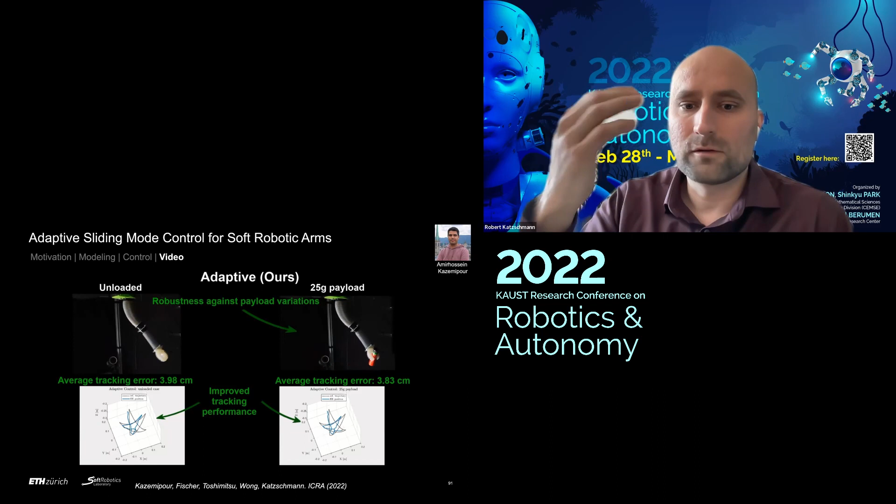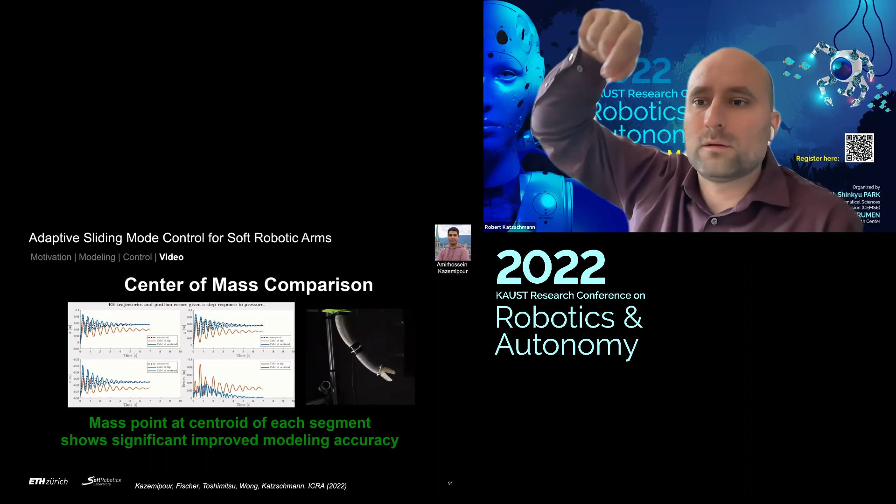We recently submitted another work on this topic, where we put an additional degree of freedom into the arm to reach a larger workspace along the axis of the arm, when the arm is hanging downwards. So we can reach more objects, pick from one place and place in another, but that's unpublished work, so I didn't show that here today.

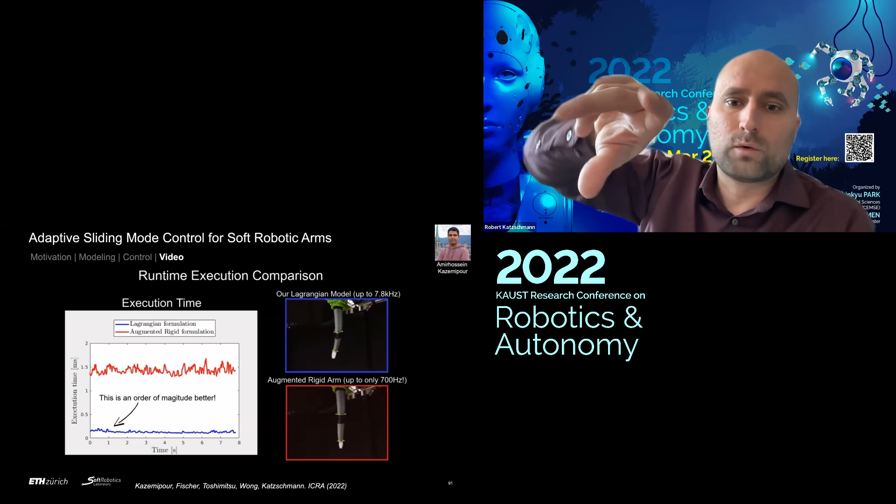In terms of the grasper, this is a 2-finger gripper, so we can only grip objects that come into the right location of the gripper. You could come up with a more universal gripping approach, like a jamming gripper, or have more fingers, or a modality that allows you to rotate the gripper, so when it goes to a certain place, it picks from there. We haven't investigated this part further yet.